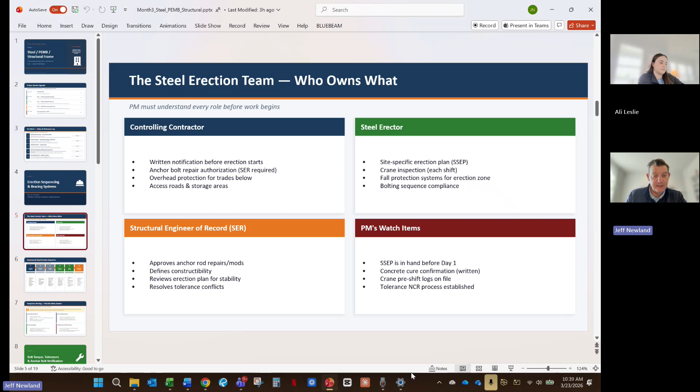Some of our anchors were off, one way or the other. And whenever that happens, we have to let the engineer know, and then they will say, "Yep, okay, you can go ahead and epoxy those," or "Yes, you can go ahead and cut the base plate, maybe make the holes a little bigger so they'll fit," that type of thing. So you'll see in our steel drawings.

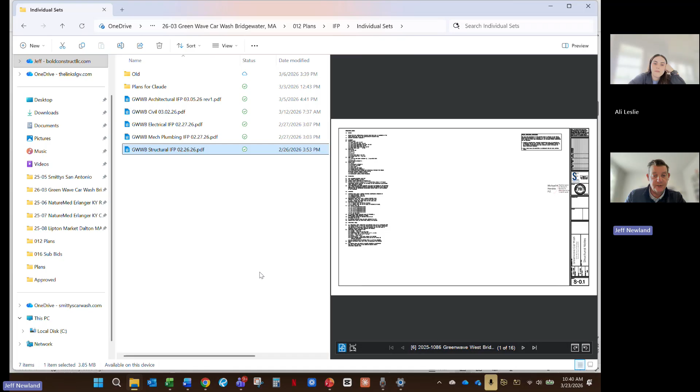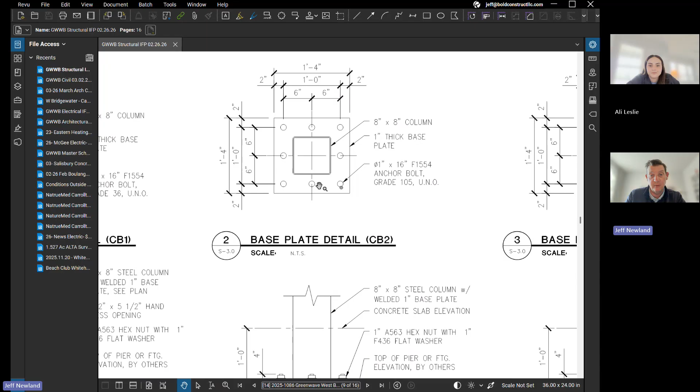I'll bring up West Bridgewater as an example, because all the car wash stuff is pretty much the same, and I'll show you what we're talking about. We have this layout that we lay out all of the columns and footings by. And then if we go to our base plate details, these are by far the hardest columns to set, because they've got so many anchors that we're trying to line up. So occasionally we might have to make this hole just a little bit bigger.

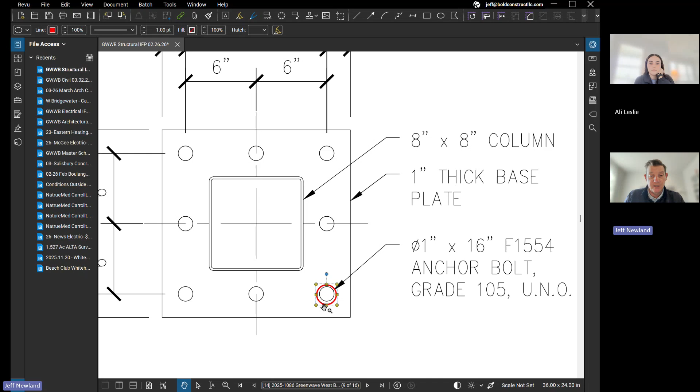And the steel erector most of the time will take his torch and make it a little bit bigger, take the column off, see which one he's got to do. Something else we could possibly have to do is notch the base plate. Blowing out a hole is when you make the hole just a little bit bigger. We don't ask for approval on that. Typically, that's a standard practice, not a big deal.

If we have to modify the base plate at all, like this, or maybe we're not notching it, maybe we've missed it so bad that we actually need to scab on a piece of the base plate, or maybe we've missed it so bad we have to cut the column and move the column. That's typically what we would do in this situation.

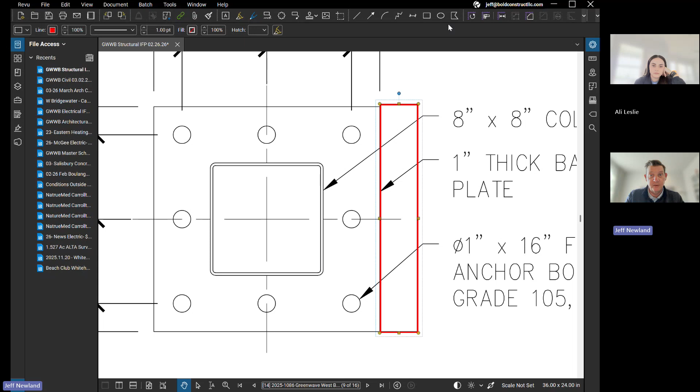We make the base plate a little bit bigger. We have somebody structurally weld this and get it inspected. Then we actually move this column. So if it's here, then maybe we need to move the column to here now.